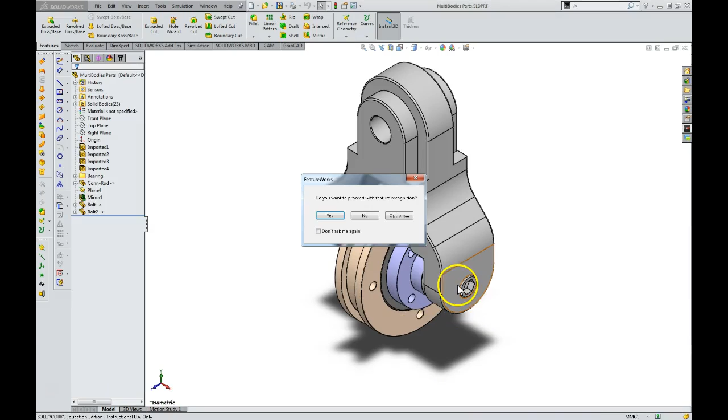So when we go to File, we're going to open up the multi-body part. You'll notice the file given to us already has the bolt and connecting rod in it, and that's supposed to be part of this lesson. So I'm going to start by deleting these bolts, and we're also going to delete the connecting rod.

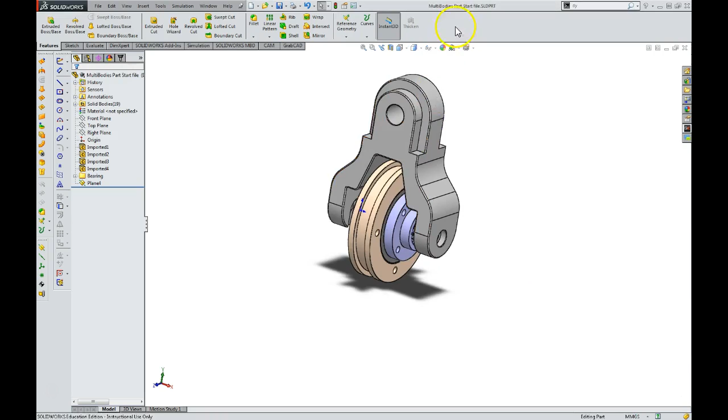Now this is the file that's shown in the book that we're supposed to be starting with. So I'm going to do a Save As, MultiBodies Part Start file. Okay, so this is where we're supposed to be beginning. I'm also going to go to my settings and make sure my document properties is ANSI and my units are inches.

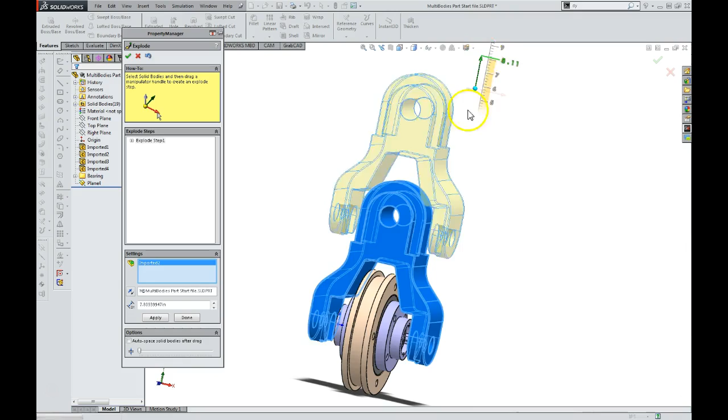Next, we're going to try to follow along with the instructions on page 932, where we're going to go to Insert and Exploded View. The object we want to select is this, and when you select an object, it creates this triad. We're going to grab this green handle, and it allows us to move that object away from its assembled position. The author says he wants that to be 10 inches, so we're going to hit Apply.

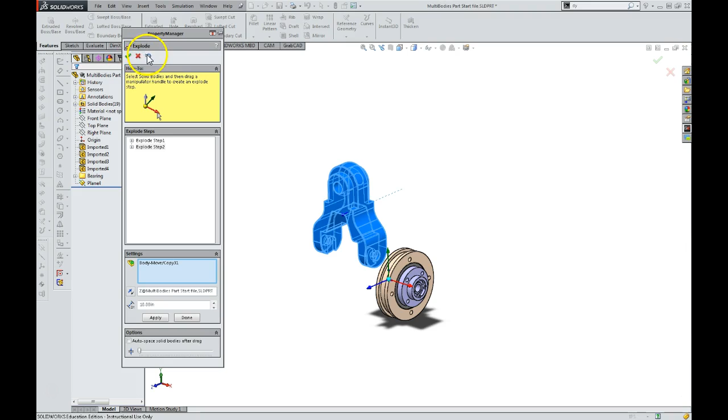Oops, make sure I still have that selected. I had the wrong arrow highlighted, so let me make sure the green arrow is highlighted, and now hit Apply. I believe that moved it 10 inches from its original location. Let's see if I can go back 2 steps here. Here we go, so let's try that right from the beginning. Hit Apply - that looks better.

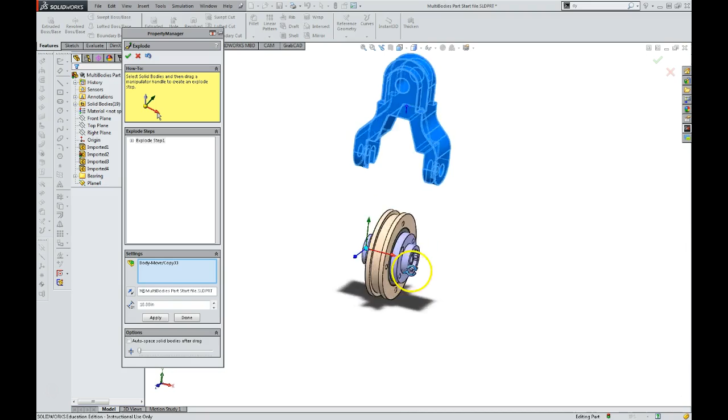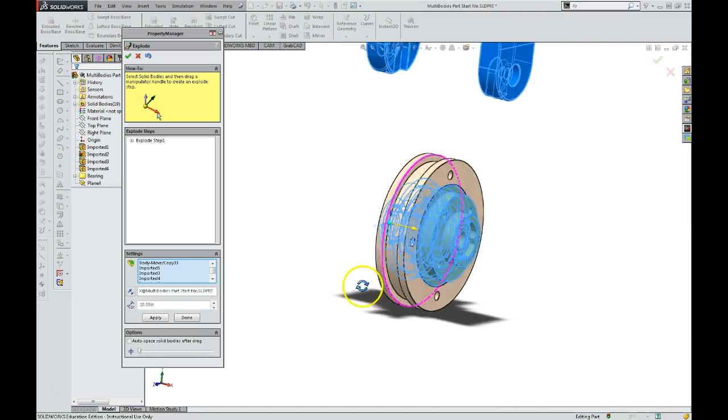Next step is to create a bounding box around this feature, and we're supposed to remove one of them so it stays in position. I'm going to delete that from the selection, grab the red triad - did not like that.

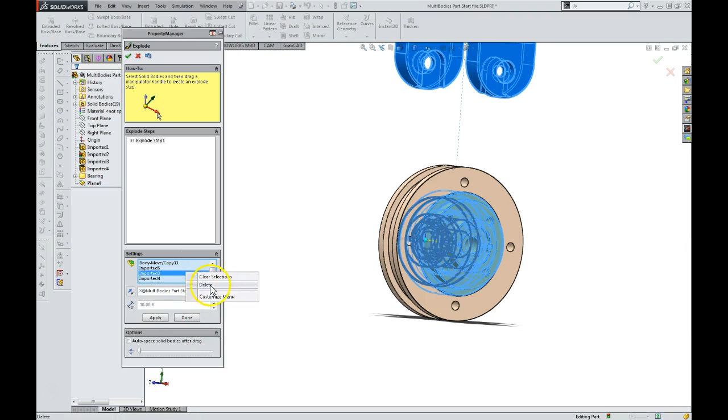I'm going to clear this selection and try doing these one at a time. So I'm going to select this part, and let's see if we can move that out. Not going. Okay, I accidentally exited out of my exploded view command.

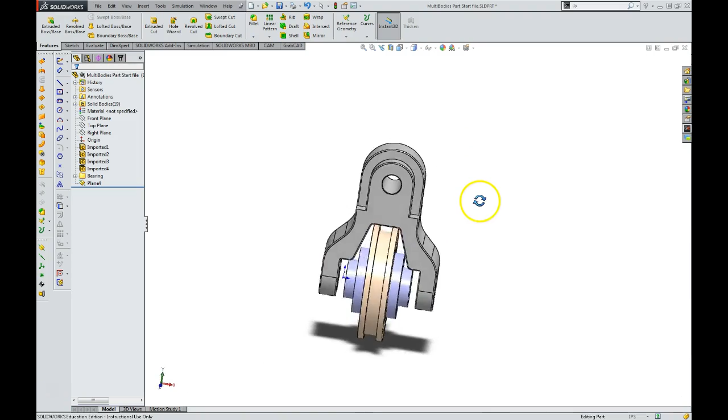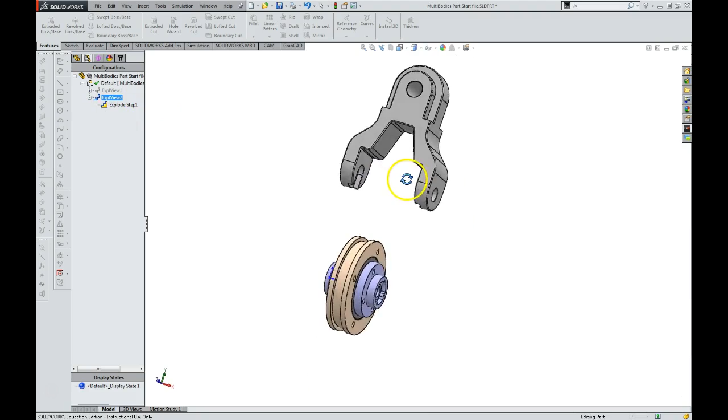If we go up here to Configurations Manager and we select Exploded View 2, I can go ahead and edit this feature, or first I can double click on this and get myself back to where I started. And now if I want to start pulling these parts out, I can edit this feature - oops, let me try that again. I believe we want to hit here, edit feature.

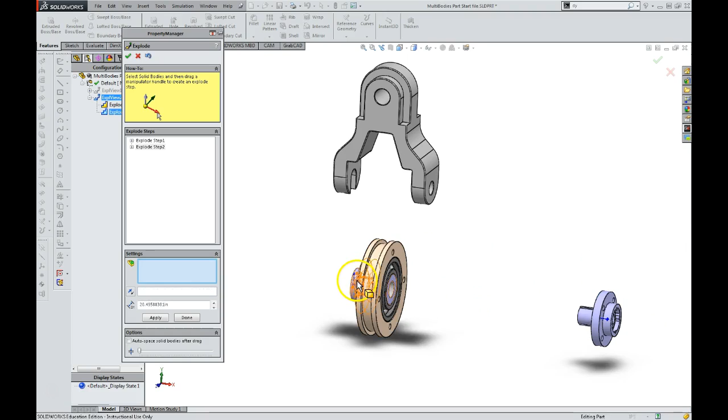Okay, now if we select these lower pieces, we're going to get a similar triad. We can drag these out, trying to recreate something similar to the book.

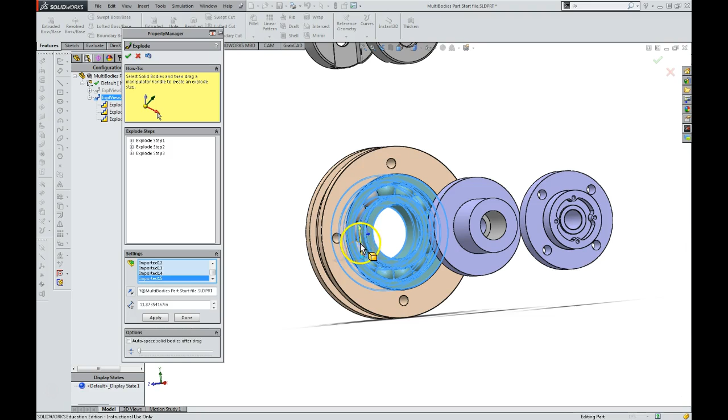Now, interestingly, when I select the bearing, it's several different components. I have the inner race, the outer race, and each of the ball bearings. So I'm going to go around and select them all individually. Notice they're all becoming part of this selected set now, and hopefully when I get to the end - oops, I lost my triad. There it is. Now we can pull them out as one item.

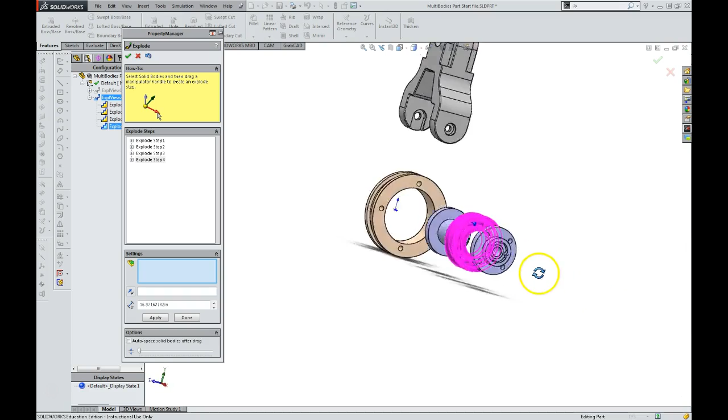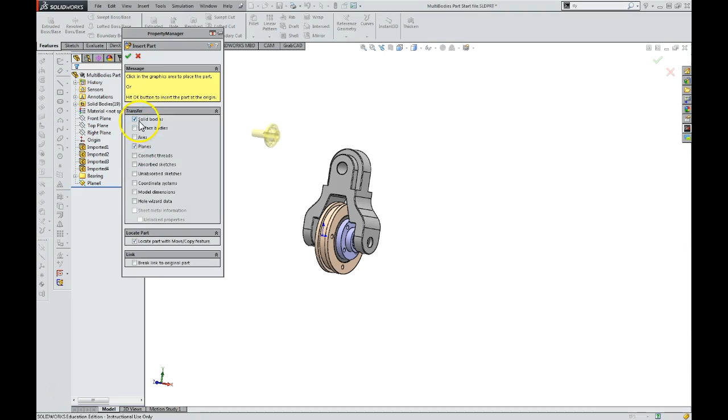So that looks similar to what's shown on page 932. Before we bring in our connecting rod and other parts, we need to collapse this view. By collapsing the view, when we go to insert, the part option becomes available. We're going to bring in this connecting rod and make sure we have planes, solid bodies, and locate part selected. I'm going to place it right here to start.

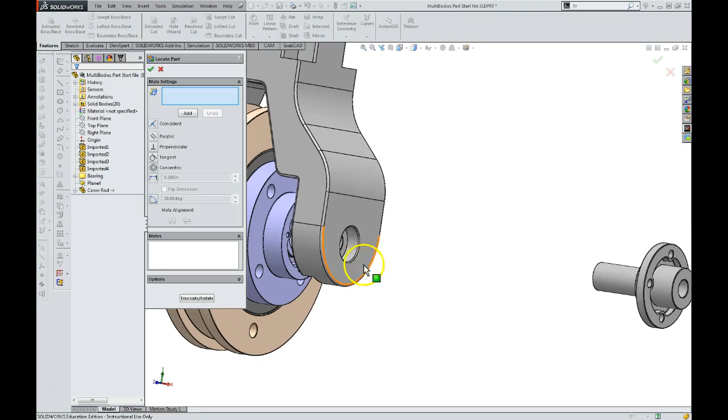That should launch our property manager, where we're going to add some constraints or mates to this part. The first item we're going to do is add a concentric mate between this cylinder and here. And we can hit add.

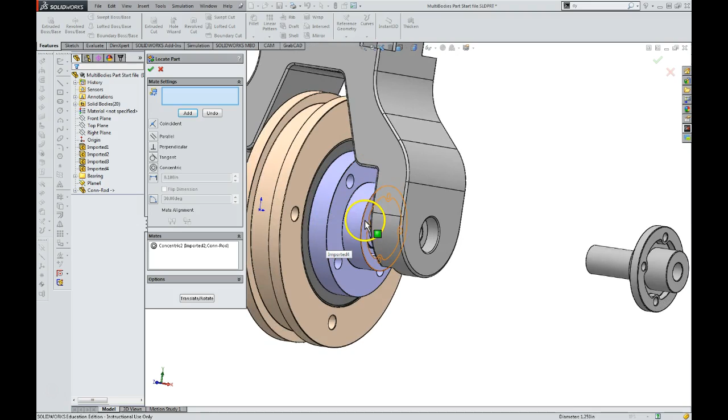Next, we want to add a coincident mate between the face here and this face. So we're going to select this face and this face, and the coincident mate was by default. We're going to go ahead and hit add.

We're going to go under views and turn off the planes. We're going to add an additional plane to the features tab. We're going to go to our reference geometry and add a plane.

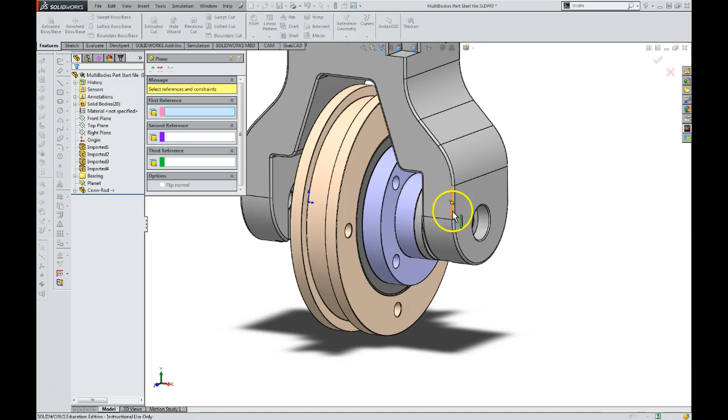Select the outermost left and right faces of the main housing. So this face and this face, and then we're going to select the option of a midplane and hit OK. Just going to grab the corner of that so it's a little easier to see. Now we have a plane directly in the middle of our part.

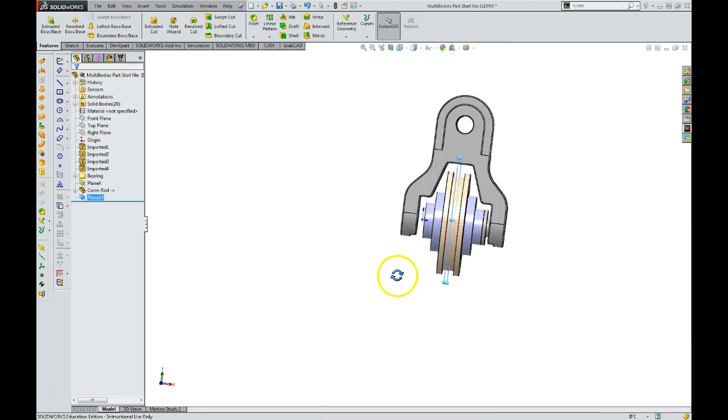We can use that for our next step, which is to mirror. So under the Features tab, we're going to go to the Mirror command and select this new plane. It's already selected for us because I had it highlighted. Now we need to select the features to mirror, and the first item we're going to select here is this connecting rod, and put one on the other side.

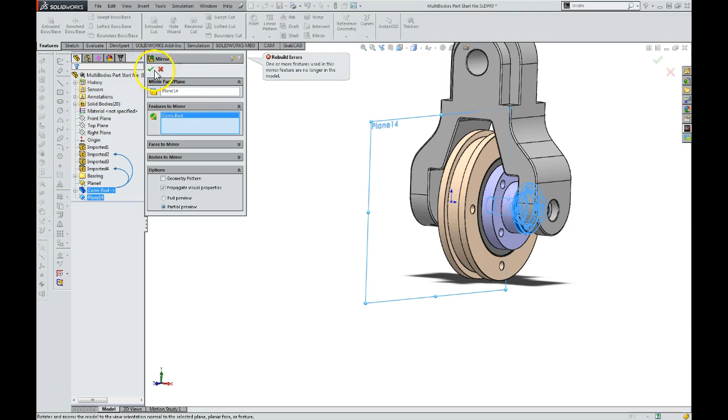We're now going to go in and... oops, didn't like that. Not quite sure what the issue was with the mirror command. I'm going to see if we can do a workaround by inserting that part again, a second time.

And see if we can add some constraints. Now, I forgot to activate my constraints, so I'm just going to go in here and edit that and hit my constraints button.

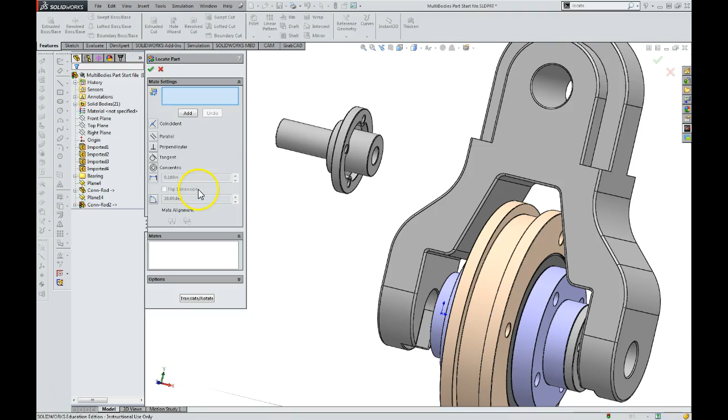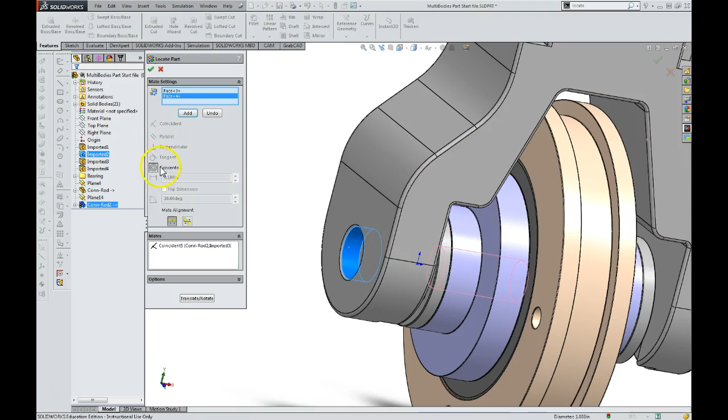Let's see if we can mate this face to this face using a coincident, but I want to flip that guy around. And then I'm going to hit add, and then we need a constraint between these that is concentric, and we have it.

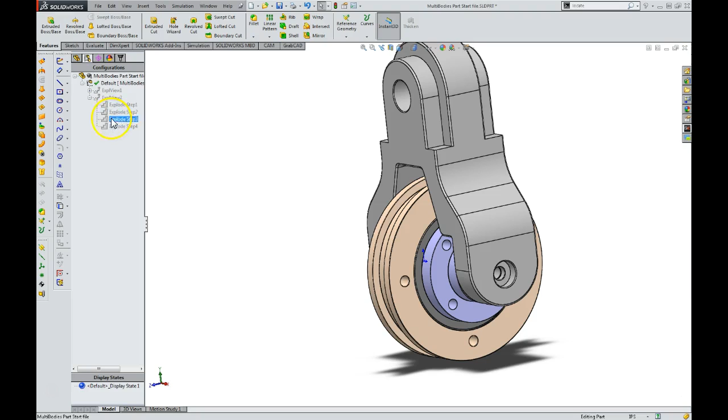I don't know what other errors might come up along the way, but that looks like the correct part. I'm going to go to our configuration manager and we're going to edit that, edit our exploded view. So I'm going to double click on this.

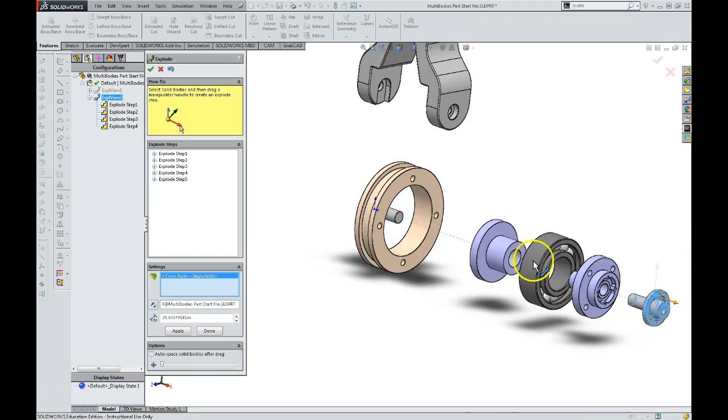Should bring me to here, and we want to edit this feature and move these guys out. So I'm going to grab this, pull it out, grab this guy, move it out the other side, and hit OK. So we've made some edits to that.

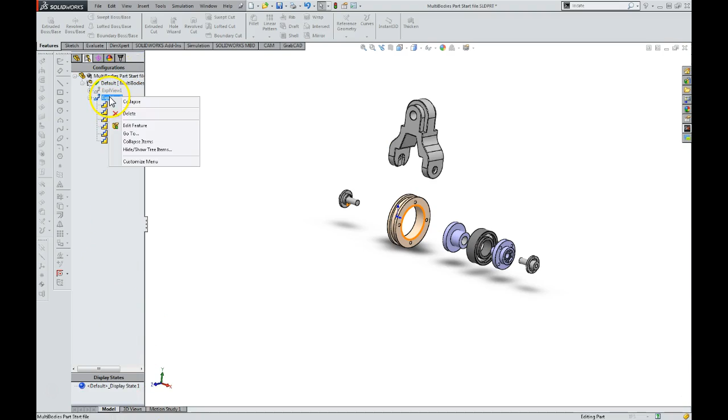We're going to move on and collapse this. This is necessary to pull in the remaining features, and we're going to pull in now the bolt, place one over here.

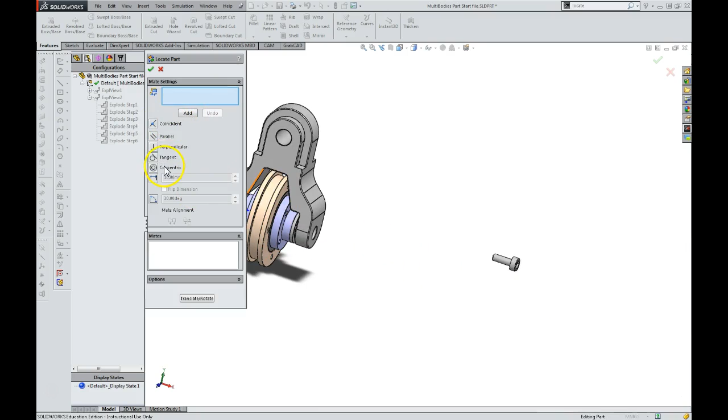And we're going to add some constraints for this guy. So let's launch our constraints. Start with a concentric, hit add, and let's see.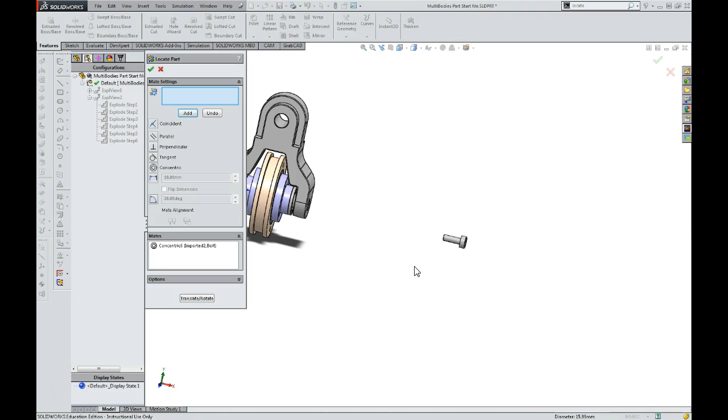So we need to select these faces. And we're going to add a coincident mate.

Looks correct. We need to insert another copy of this. So I'm going to hit OK and go to Insert. Second copy of that bolt.

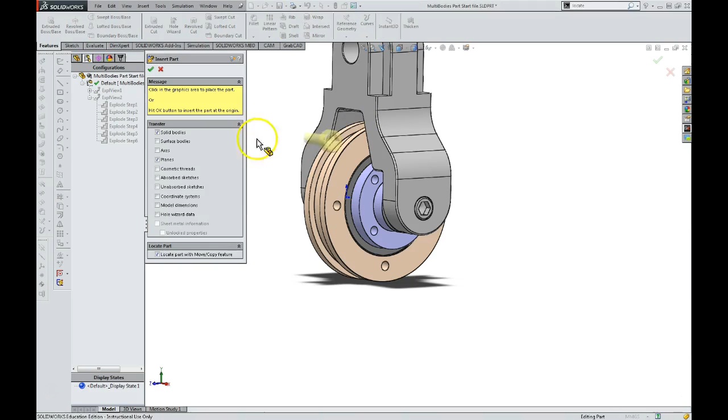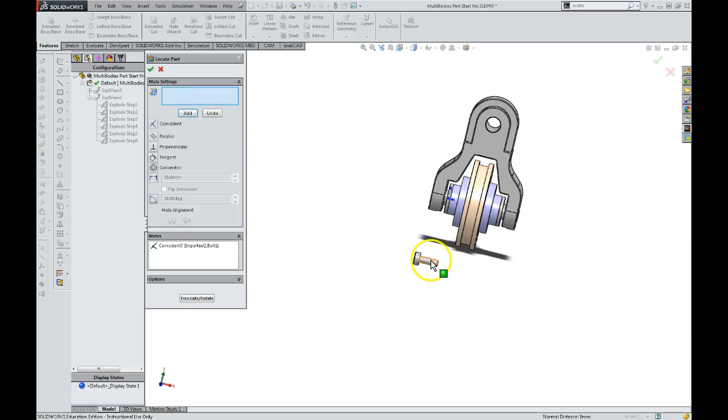I'm going to start with the coincident mate. I do want to flip that part and then add, oops, then we want to add our concentric. Notice that it has a smart mate option and figured that out for us. So we're happy with that.

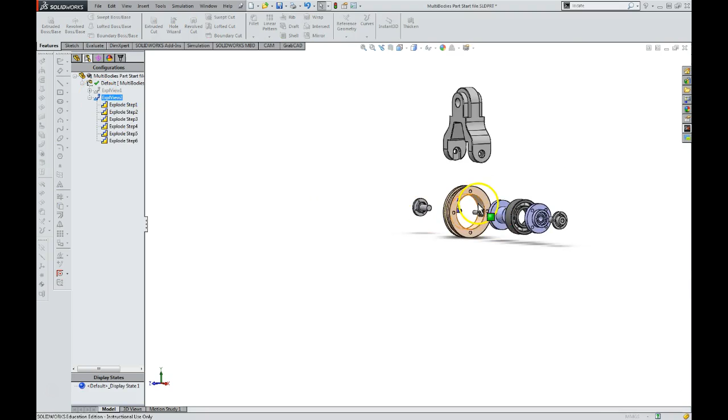We're now going to go back in once again and activate this exploded view, and now we need to edit it once again because our bolts are inside here. So we're going to right click and edit that feature. Start with this bolt and just pull this out.

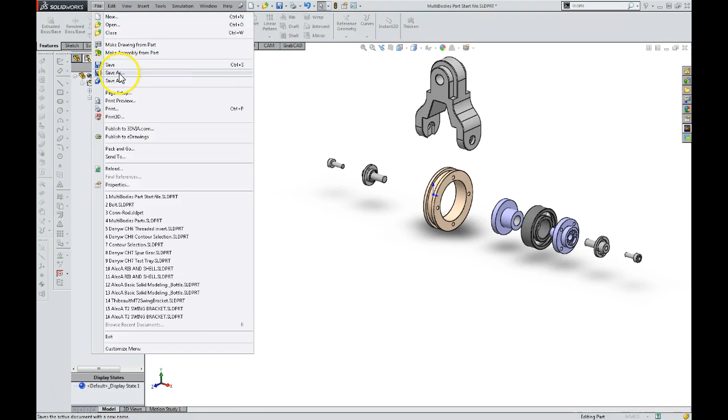We're going to go ahead and save this. Save it as my last name this time. And I'm going to get rid of the start file and call it just its correct name.